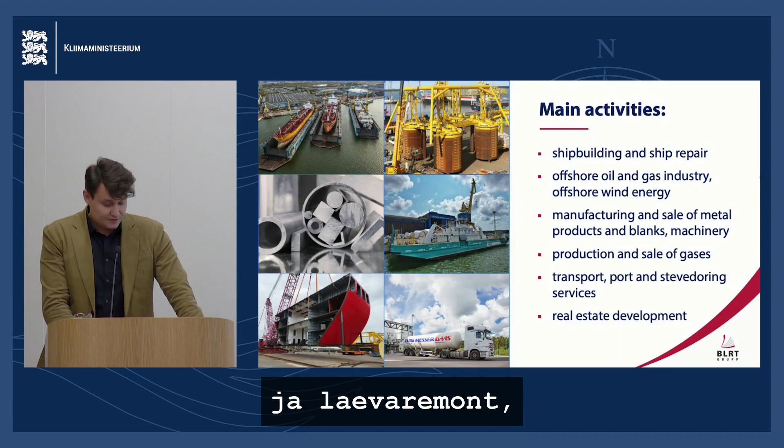Main activities: shipbuilding and ship repair, offshore and oil and gas industry, offshore wind energy, manufacturing and sale of metal products and blanks, machinery, production and sale of gases, transportation, port and stevedoring services.

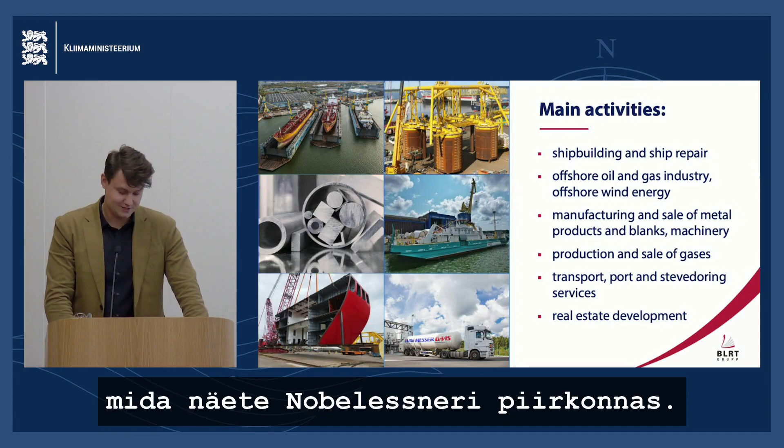Real estate development in step with the latest trends, which you can see in the Noblessner area, for example. Each subsidiary is a reliable partner in its field.

Shipbuilding is one of BLRT Grupp's historic lines of activity. Today the holding can develop a conceptual design, prepare technical documentation, and build ships on a turnkey basis.

The shipbuilding yard we have in Lithuania, named Western Baltija Shipbuilding, specializes in the construction of grand blocks for cruise ships, multifunctional supply vessels, research vessels, tugboats, and other turnkey ships up to 130 meters long.

Another shipbuilding yard we have is in Tallinn. Our shipbuilding part is mainly focused on the fish farming market and small shipbuilding, offered by the BLRT Grupp company named Marketex Marine. We offer turnkey solutions from project design and development through to finished product delivery to the customer. We have been operating in the Norwegian market since 2000 and have constructed more than 400 feed barges for our customers.

This has made a significant contribution to Norwegian aquaculture. Marketex Marine built barges with feed storage capacities ranging from 100 to 900 tons, successfully operating worldwide, from Japan to Chile and from Norway to Greece. The maximum weight of the barge is 1,000 tons.

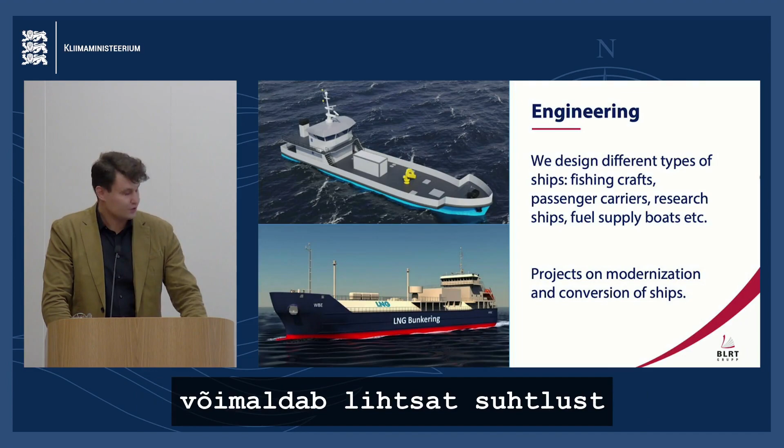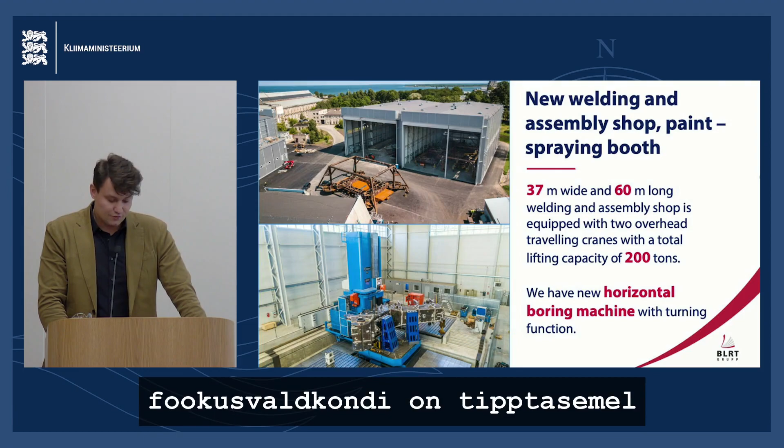One of the key focus areas of the holding is the manufacture of high-end equipment and complex structures for the oil and gas and offshore wind power industries. That's the main focus of Marketex Offshore Constructions, operating in Estonia.

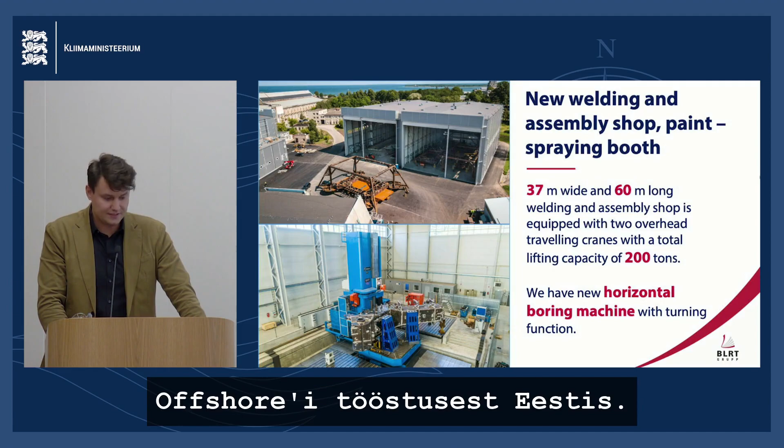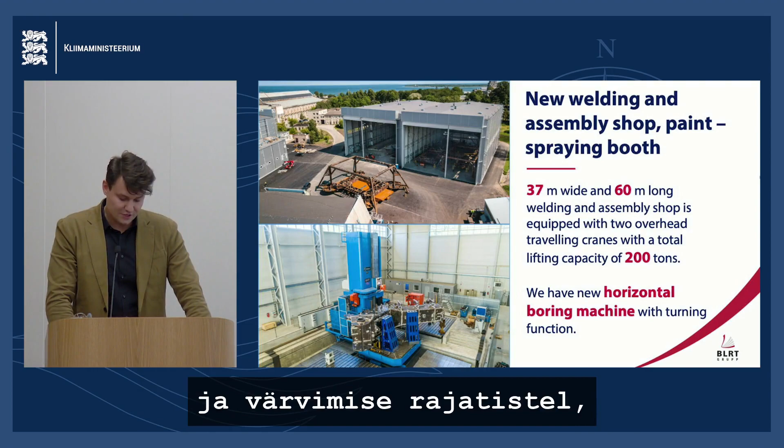In 2020, as part of our development program supported by Enterprise Estonia, we opened brand new welding, machining and painting facilities, from which we deliver large fabrication projects for the North Sea and beyond. The new fabrication facilities enable us to expand our services and meet growing customer demand.

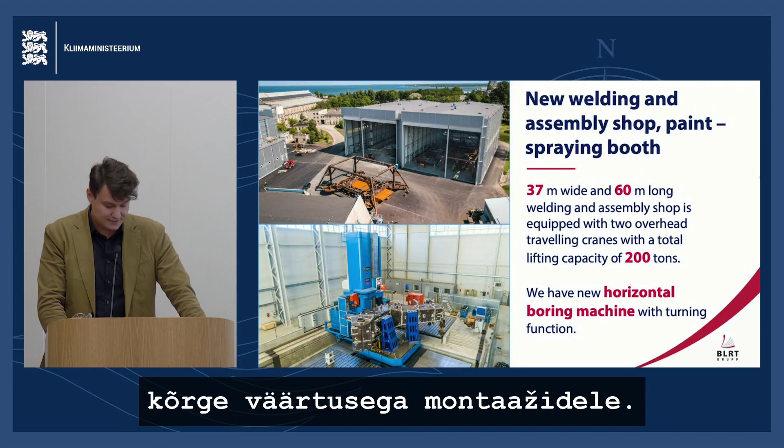We can offer an integrated supply chain solution for large and high-value assemblies. The company pays special attention to energy markets with high-quality standards and requirements, ensuring strict quality control and compliance with deadlines.

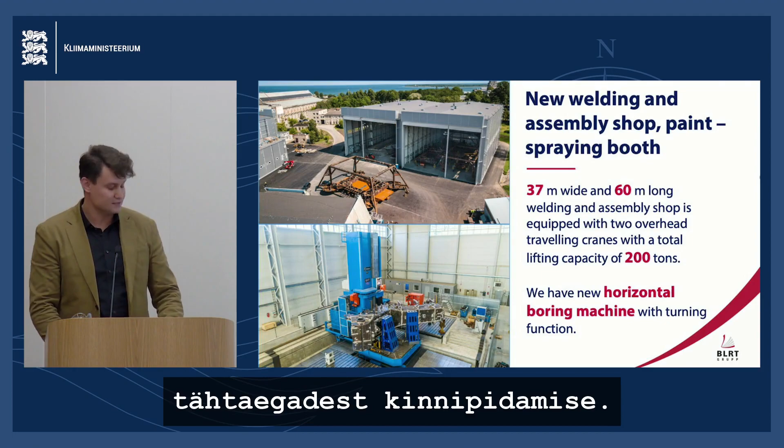Over the years, the company has implemented many challenging and unique projects. The number of implemented offshore wind power projects has been growing, validating the adopted project development and diversification strategy.

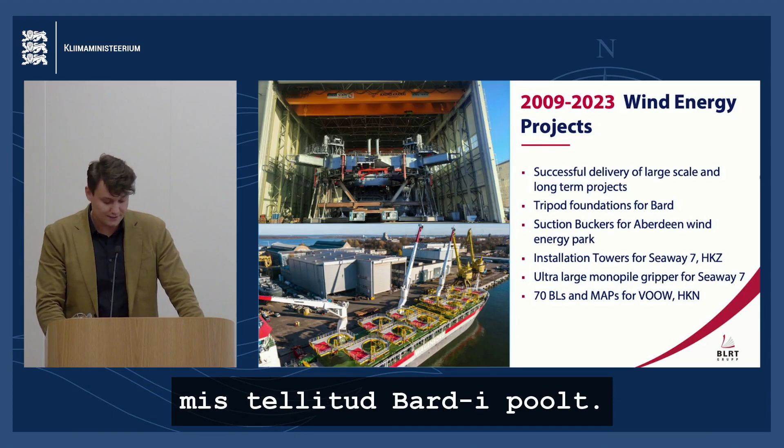For instance, the company has constructed foundations for offshore wind turbines commissioned by a German company, manufacturing and supplying 21 anchor frame structures for a 92.4 megawatt wind farm located in Aberdeen Bay in Scotland.

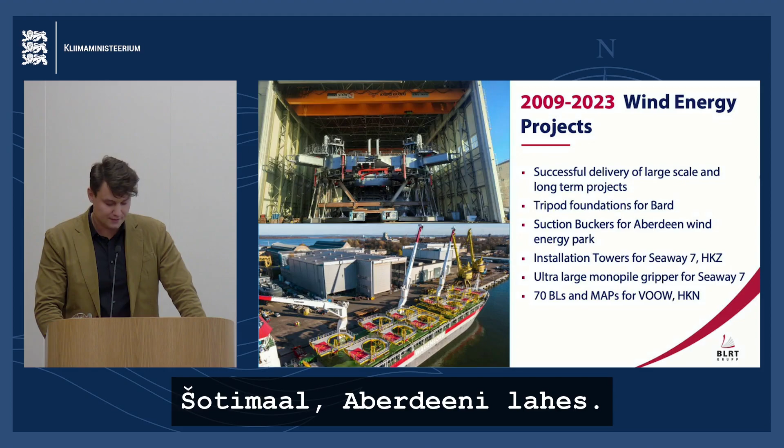Today, Marketex Offshore Constructions is the best choice for wind power projects in the Baltic Sea region. The Marketex Offshore Constructions portfolio includes some Dutch partners for which the company has manufactured various equipment.

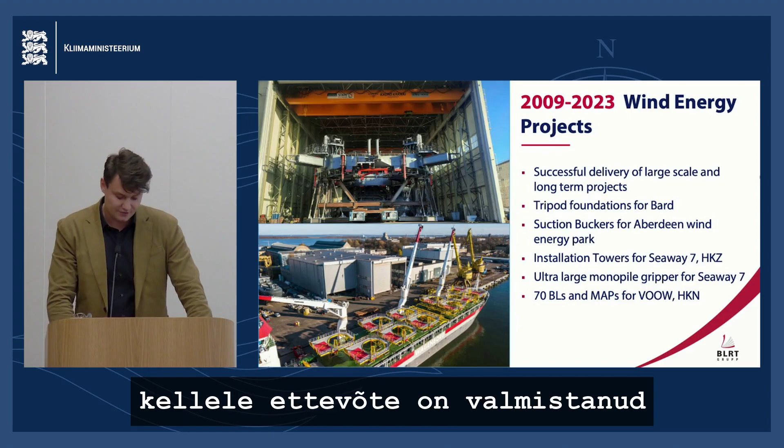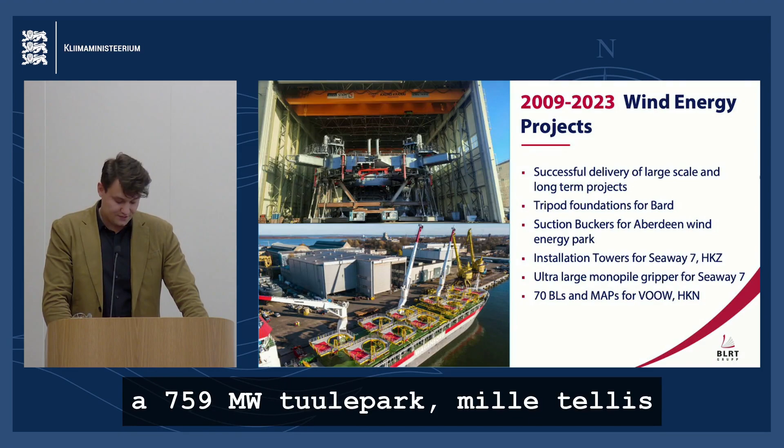One example is a unique monopile gripper for Seaway 7, for the offshore installation of monopiles up to 3,000 tons. In addition, there is another project for a Dutch customer: the fabrication of steel structures for the Hollandse Kust Noord project, a 759 megawatt wind farm commissioned by Van Oord Offshore.

And now I'm glad that we came to the shipyards part of the presentation. BLRT Group has 3 shipyards, ship repair yards: Tallinn Shipyard in Estonia, led by me, Western Shiprepair in Lithuania, not led by me, and Turku Repair Yard in Finland. Design and technical support, repair, maintenance and retrofit of different types of vessels are the yards' main activities, which we are trying to provide at the highest level.

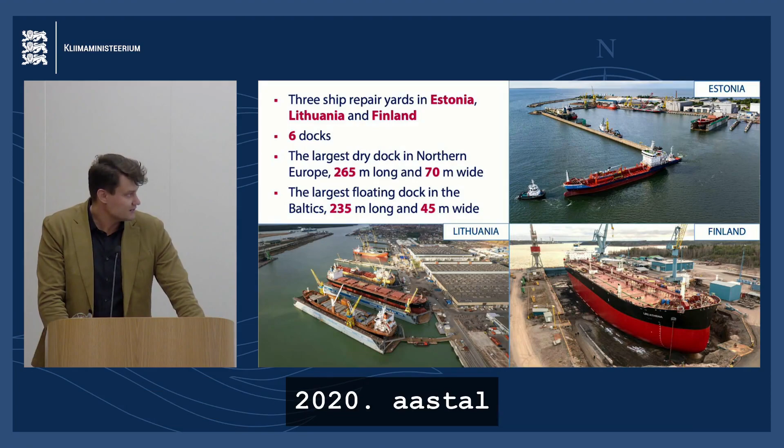In 2020, the list of docks at Western Ship Repair in Klaipėda was enlarged with 2 additional floating units. Now we have the largest floating dock in the Baltics, 235 meters long and 45 meters wide, which opens up new opportunities for customers to carry out repair and modernization projects of Aframax, Panamax and post-Panamax types of ships. We also have the largest dry dock in Northern Europe, 265 meters long and 70 meters wide, located in Turku, Finland, well known by many shipping companies in this room.

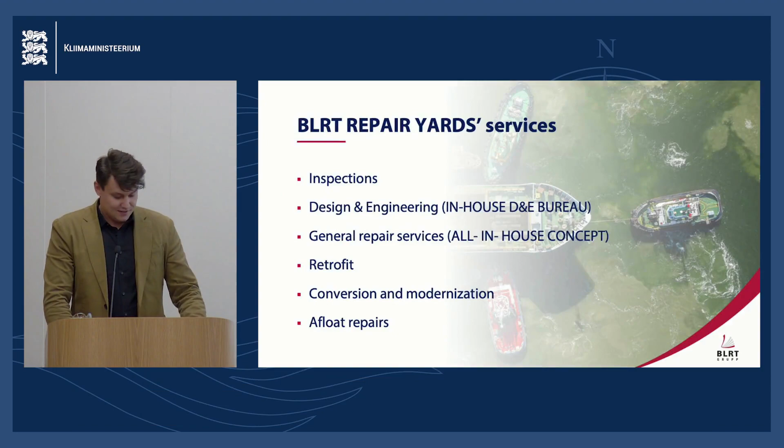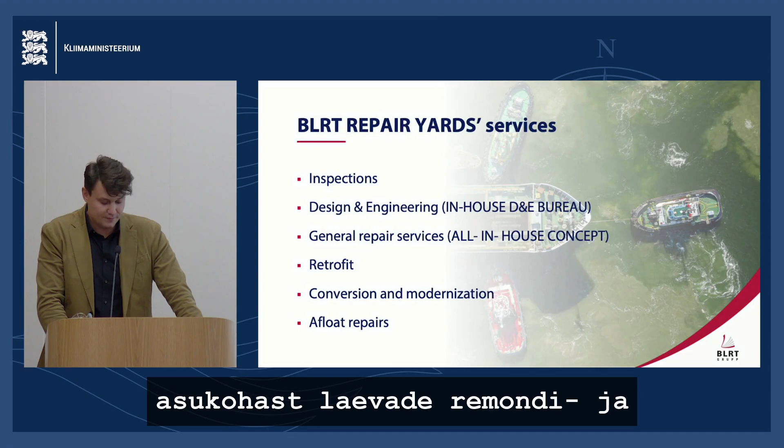In the remaining part of the presentation, I would like to concentrate your attention on the shipyards as maritime facilities, providing a wide range of technical solutions for ships in operation. Situated on the shores of the Baltic Sea, our shipyards benefit from their strategic location for ship repair and maintenance services, as well as implementation of major conversions in the maritime sector.

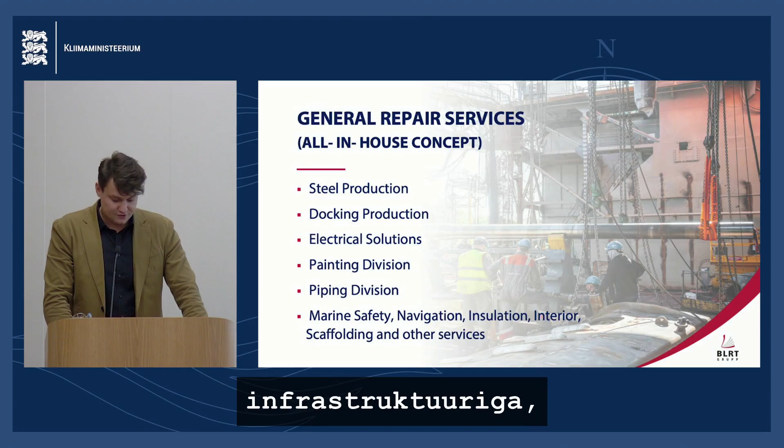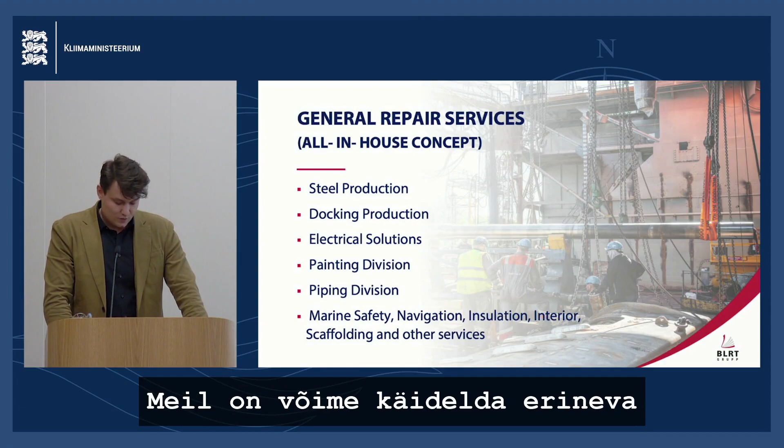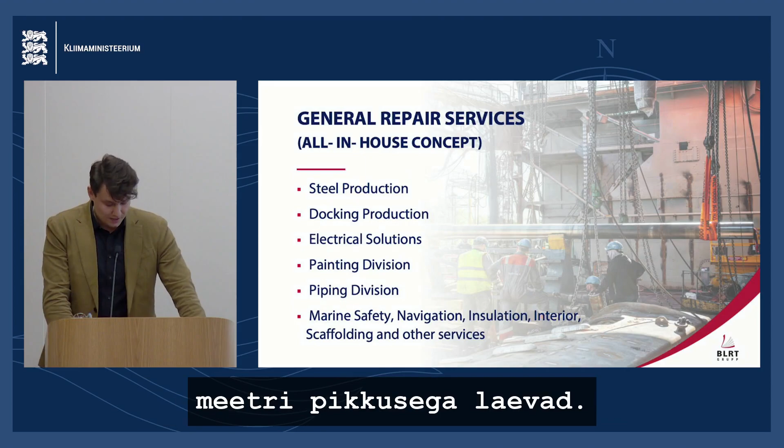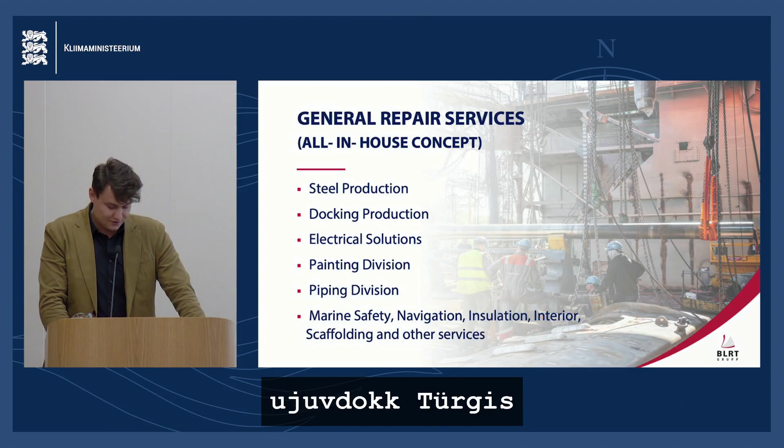Last year we decided to update the biggest floating dock, and now a new 10,000 ton floating dock is under construction in Turkey. But I will touch on this topic a little bit later.

Due to that, the clients of a shipyard widely depend on the shipyard's size and location, so our 3 shipyards are also divided into segments, both by commercial shipping companies and by ship sizes. We are maintaining and repairing around 290 ships within one year. Our main clients are from the Baltic Sea region, like Netherlands, Belgium, Germany, Norway, Sweden, Finland, and the Baltic states. However, we are not only limited to this region. For example, we have clients from Greece, Italy, Spain, and actually from China and Malaysia also.

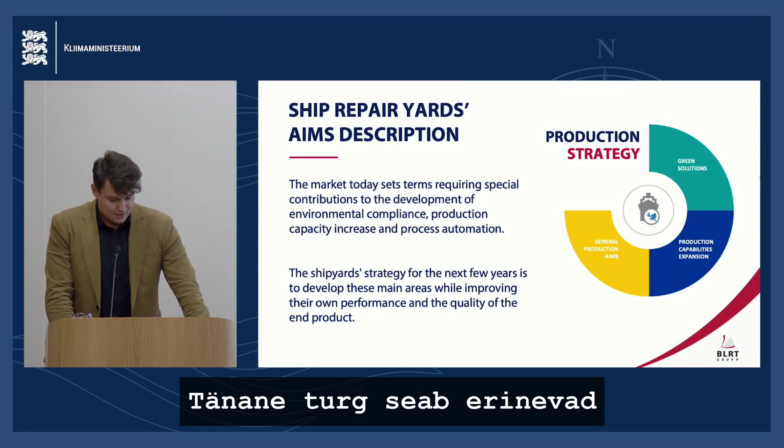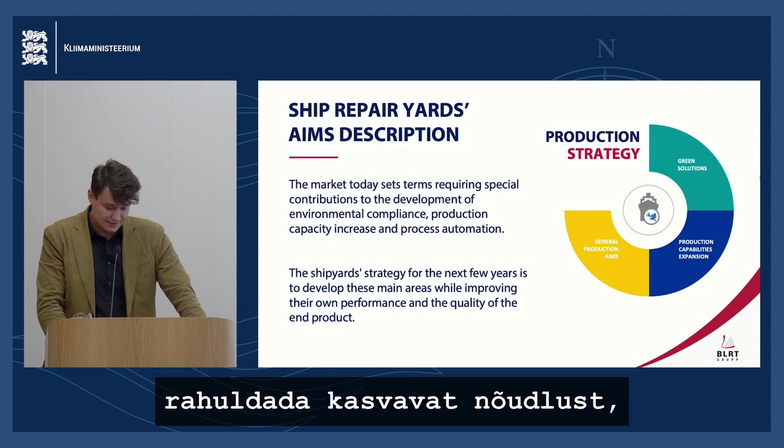Today's market sets different terms and strategic movements for our ship repair business, aiming to increase output, meet growing demand, enhance efficiency, so in general to expand and automate our production capabilities, of course taking into account the environmental impact and constantly lowering it.

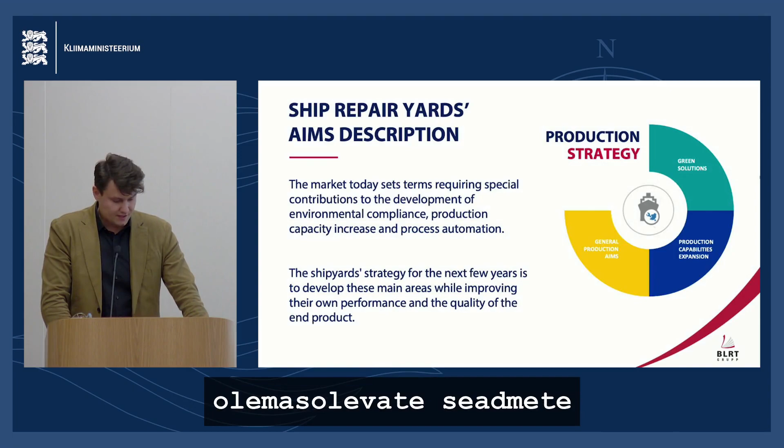We are investing in the necessary technologies and equipment, purchasing new machinery, upgrading existing equipment and productional areas, implementing automation and digital solutions to enhance efficiency.

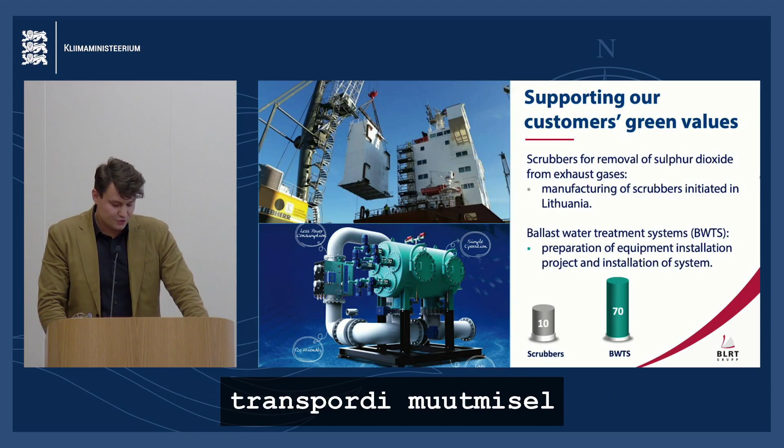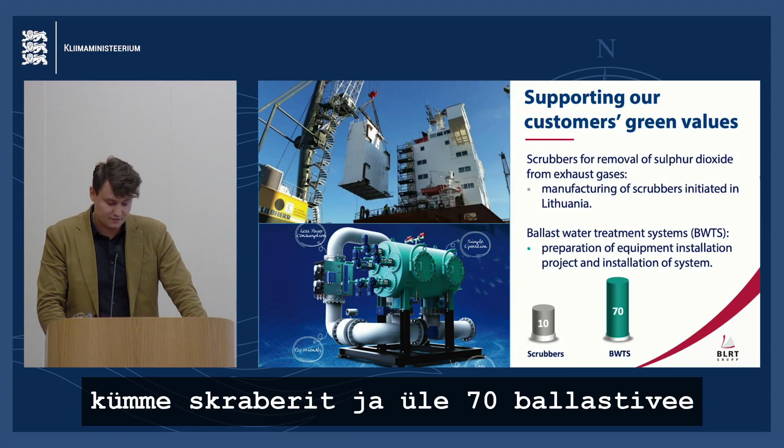During the last years, we were actively helping to make maritime transportation more environmentally friendly and compliant with compulsory international regulations. So, for example, we were installing around 10 scrubbers and over 70 ballast water treatment systems annually.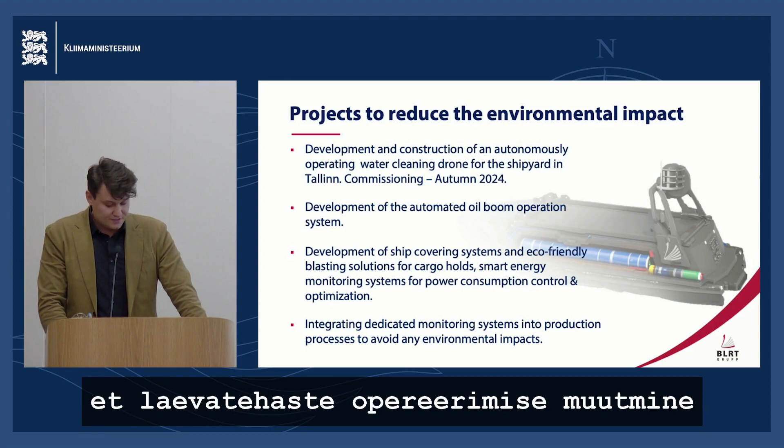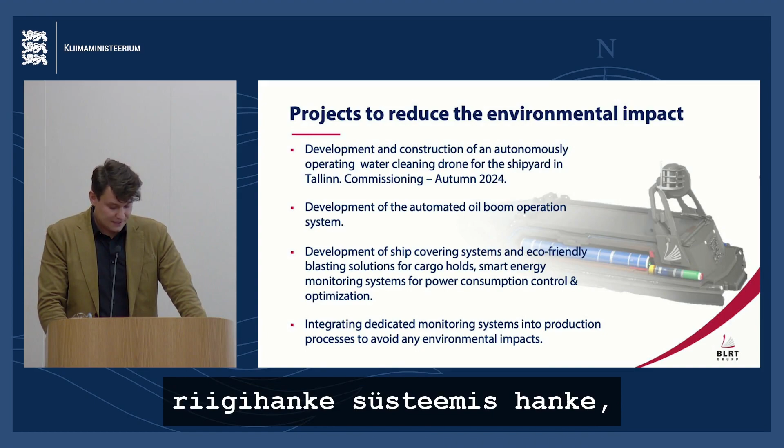We believe that making shipyard operations more environmentally friendly is important, as is reducing the environmental impact of shipping. So this year we opened a tender in the Riigihanke system for development and construction of an autonomous water cleaning drone for Tallinn Shipyard. This is an innovative and technology-driven solution designed to clean the water surface around our floating docks and berthed ships. The drone has to be equipped with various sensors, cameras, and cleaning skimmers to autonomously navigate through the water.

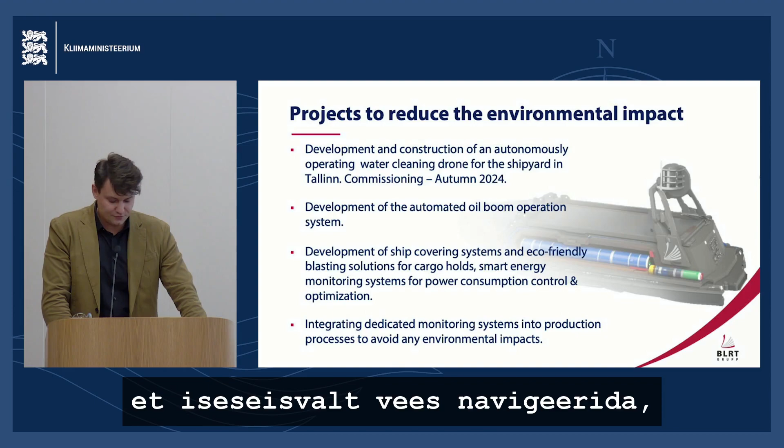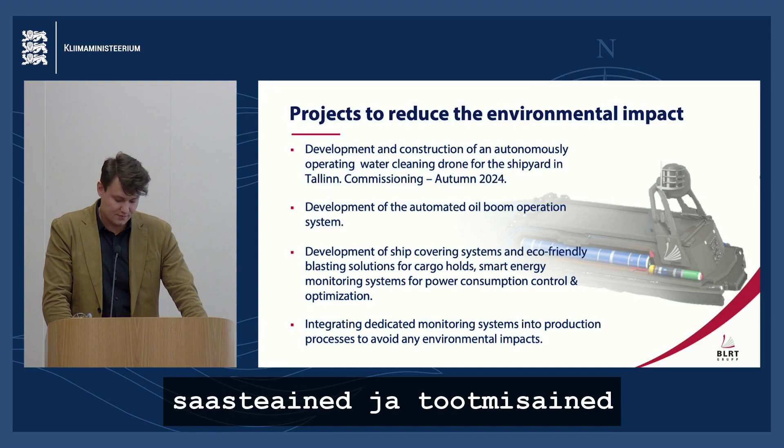For monitoring the situation, and in case of necessity, to perform tasks aimed at removing pollutants and productional substances. Next year you will be able to see this in operation, so you are welcome at our yard.

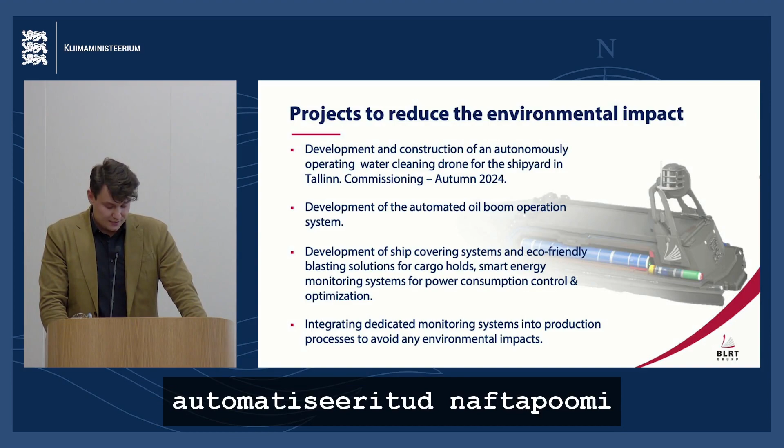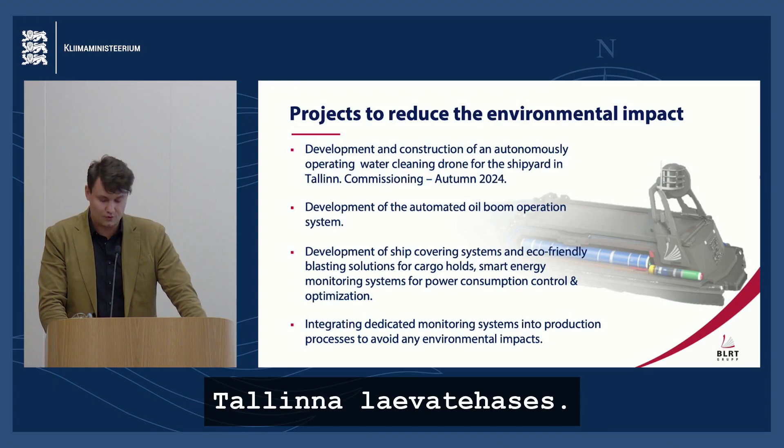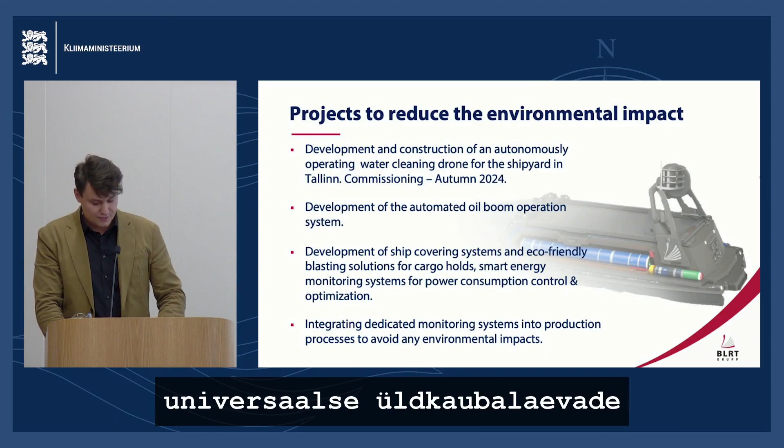We are developing an automated oil boom operating system, a technological solution designed to deploy and control oil booms used in spill response and containment efforts in Tallinn Shipyard's port water area. In addition to the purchased blast trucks and Hammelmann systems, which I will also mention on the next slide, we are working on universal general cargo ship hull covering solutions to be able to sandblast dedicated zones in green mode.

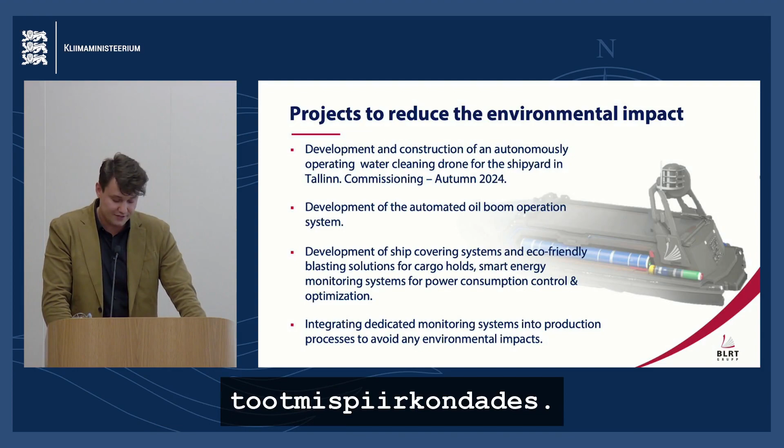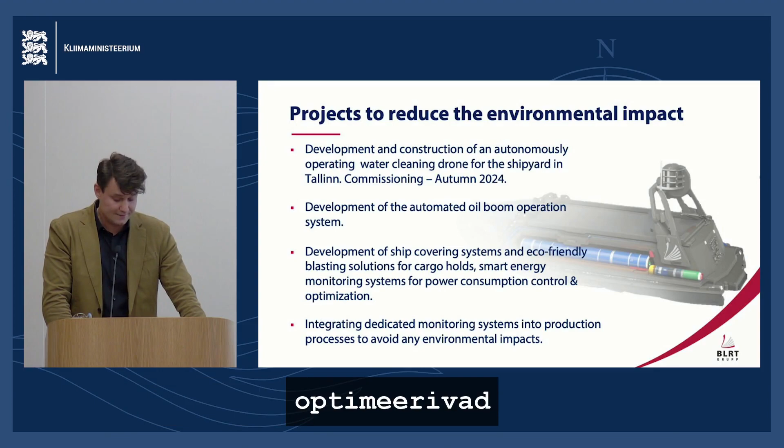In addition to some of the solutions mentioned above, we are also developing advanced technologies designed to monitor, manage, and optimize energy consumption in shipyard productional areas. And worth noting, each floating dock will have more than 100 implemented sensors for real-time monitoring and optimizing of energy distribution during the next few years.

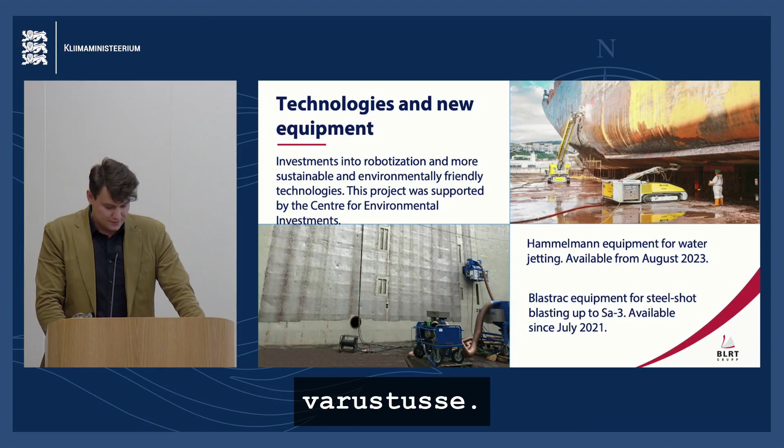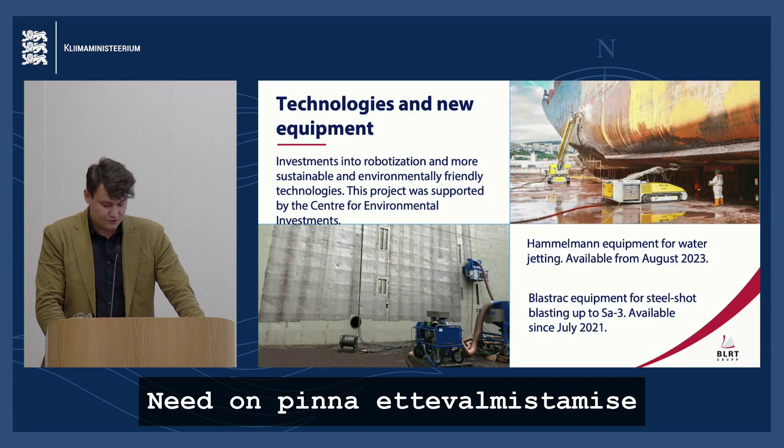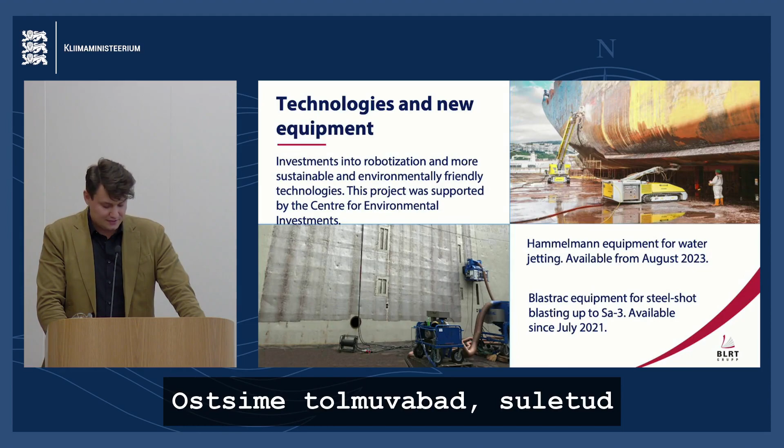As I mentioned before, we are always trying to use and invest in up-to-date equipment. On this page you can see the dust-free blasting solutions, also known as dustless blasting or wet blasting. These are methods of surface preparation and cleaning that significantly reduce or eliminate the production of airborne dust and debris. The purchased dustless closed-cycle blasting machines, named Blastrac, are working quite well during the last 2 years at our shipyard in Tallinn.

Hammelmann high-pressure blasting system we just put into operation, but already a few ships were cleaned using that, so it looks quite well.

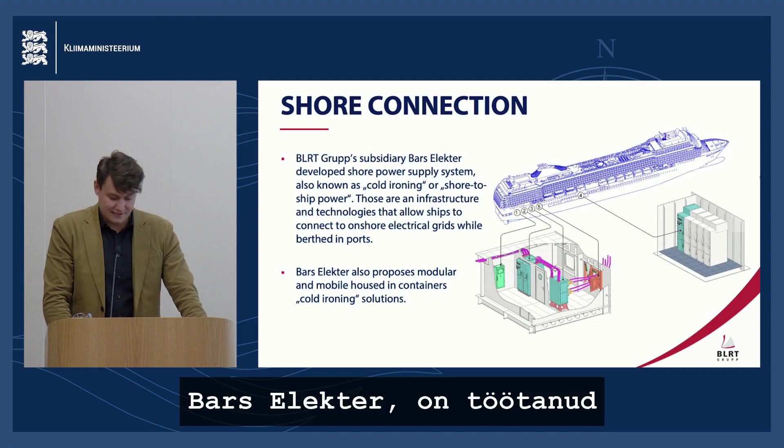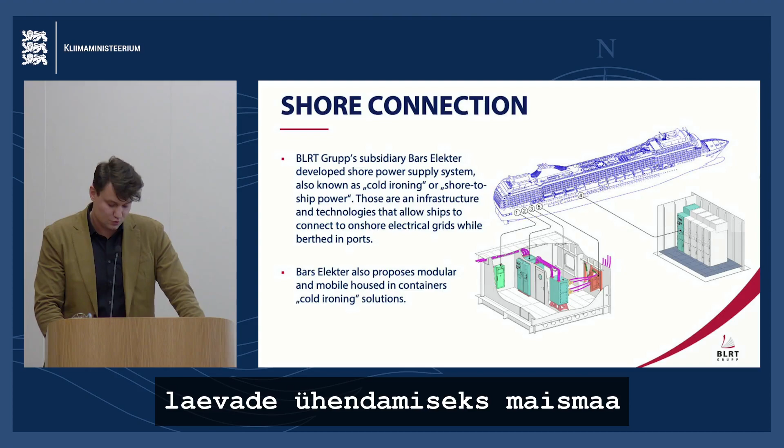Shore connection. BLRT Grupp's subsidiary company Bars Elekter has been working on green ICT projects. The innovative project centers on developing a system allowing moored vessels to connect to an onshore power supply and turn off their diesel generators. The system is modular and compact, therefore it can be installed in any suitable place on board an already built ship.

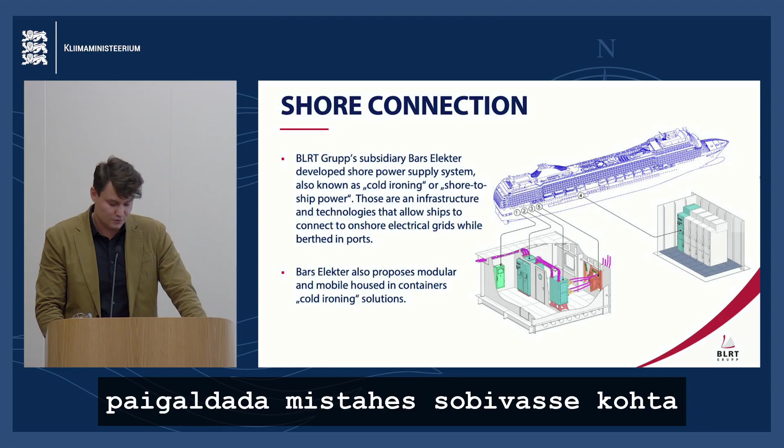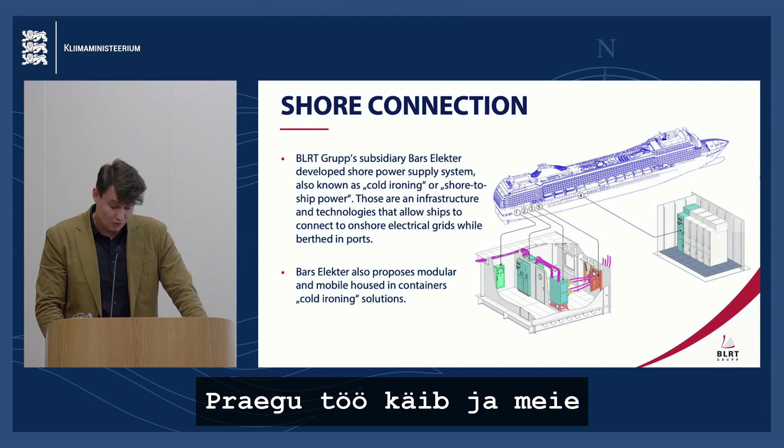We have signed a contract to install our system on board the Isabel vessel. Work is currently underway, and all our findings and innovations will come into use there, meaning that we will not only produce a viable solution, it's a turnkey project including the installation and related works.

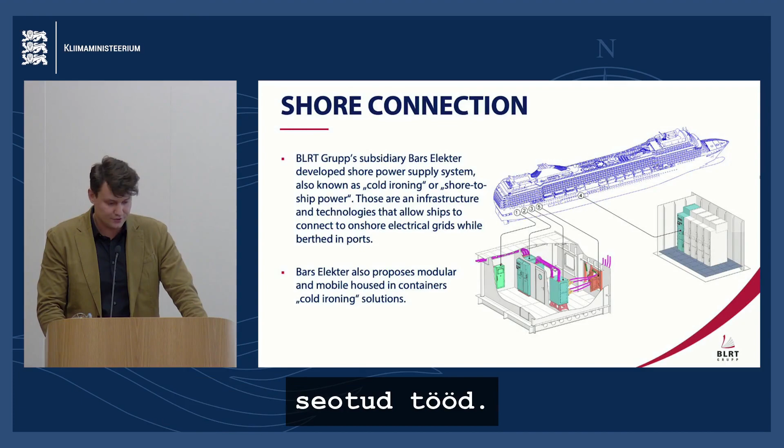Bars Elekter also proposes an innovative approach wherein a vessel would have two containers, one containing onboard elements and another containing onshore elements. The systems are modular, mobile, and housed in the containers, which means that they can be utilized both on board and onshore.

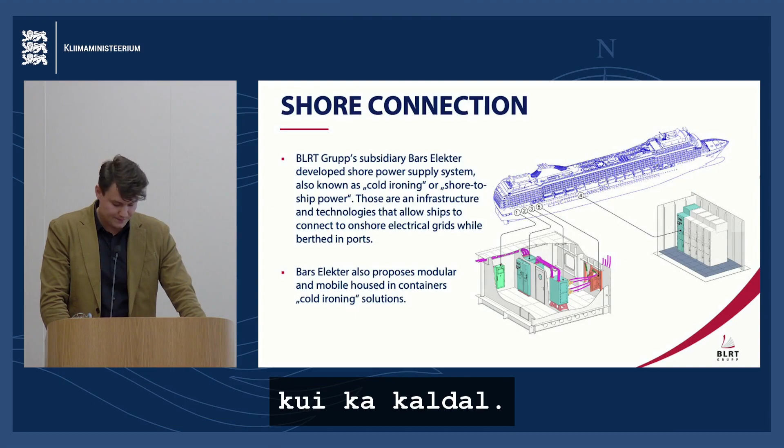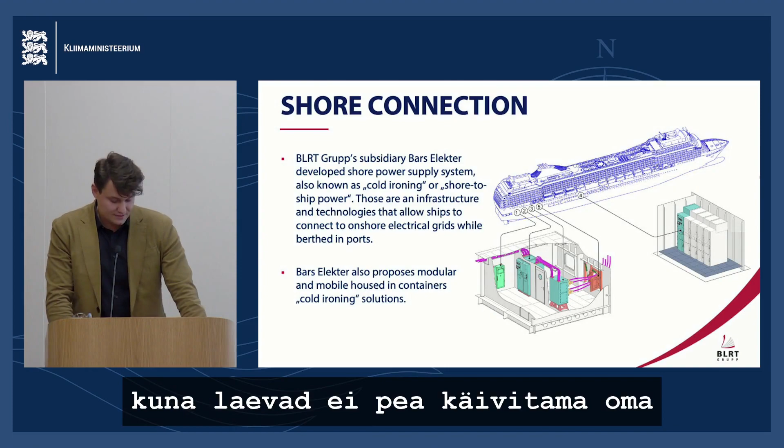The green ICT projects of Bars Elekter take the company one step closer to reducing CO2 emissions and decreasing harmful environmental impact, since the ships will not need to start their auxiliary engines and generators in ports.

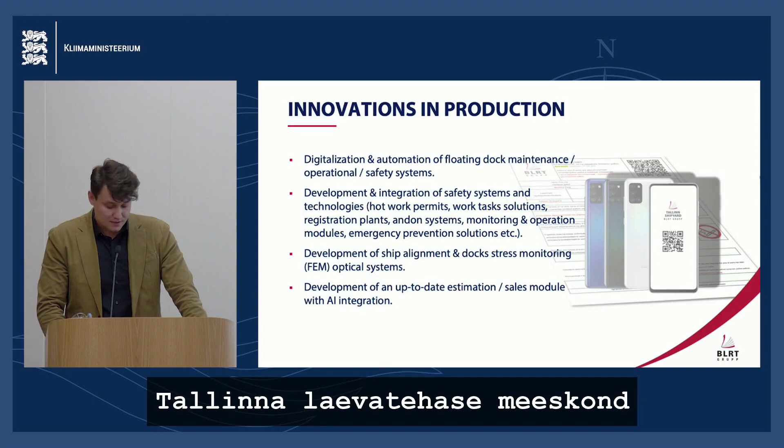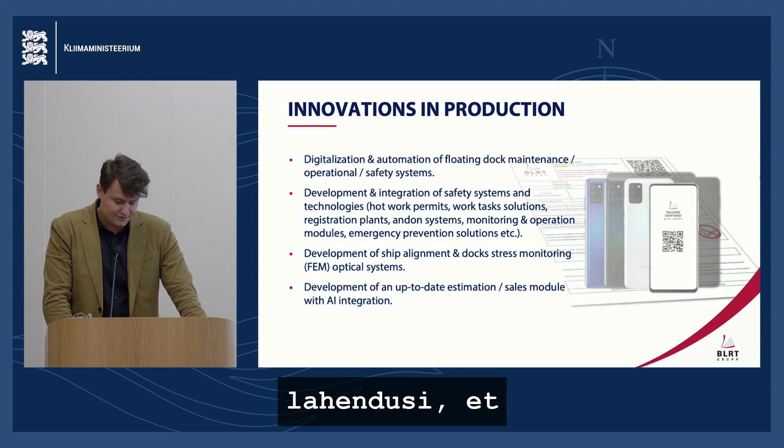Each and every day, Tallinn Shipyard's crew makes efforts to enhance efficiency, reduce downtime, improve safety, and ensure compliance with industry and marine standards. Over the past few years, we implemented the integration of advanced digital technologies and data-driven solutions to streamline and optimize the various aspects of ship repair and production platform maintenance.

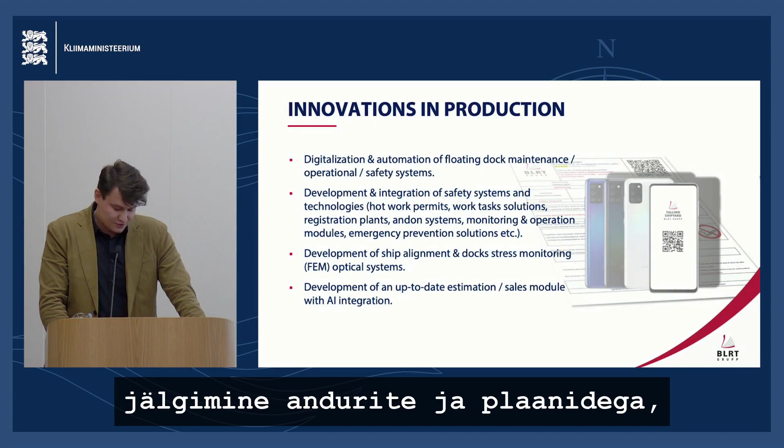Our development policy is based on Internet of Things technologies, which plays a crucial role in ship repair digitalization. Condition-based monitoring of ship repair processes with sensors and plans helps to control fire safety, work tasks for each person, performance of dedicated productions, environmental conditions, prevent emergency situations, and many other things.

We are working on unique solutions which should improve the quality and safety of dedicated operations, such as docking and alignment of ships. We will be able to remotely monitor the condition of separate dock structural elements from the ship's weight distribution using real-time sensor readings.

This will also give us an inside view that helps to increase the reliability and durability of our main marine ship lift systems.

Despite integration of digital solutions to the productional part of ship repair, we do not forget about the fundamental aspects of our activities. I am speaking about sales and estimation, because ship repair begins with the sales.

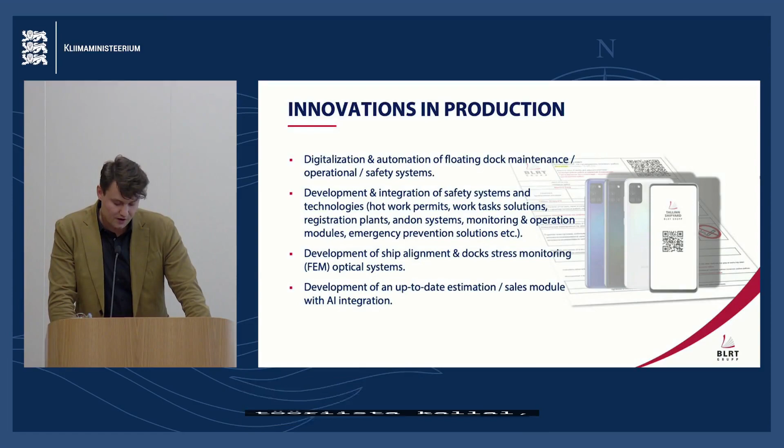At this moment we have an ongoing project where we are working on a powerful tool that can significantly enhance the sales processes, improve customer interactions, and boost sales effectiveness. A sales module software with artificial intelligence add-ons could be a successful strategy breakout.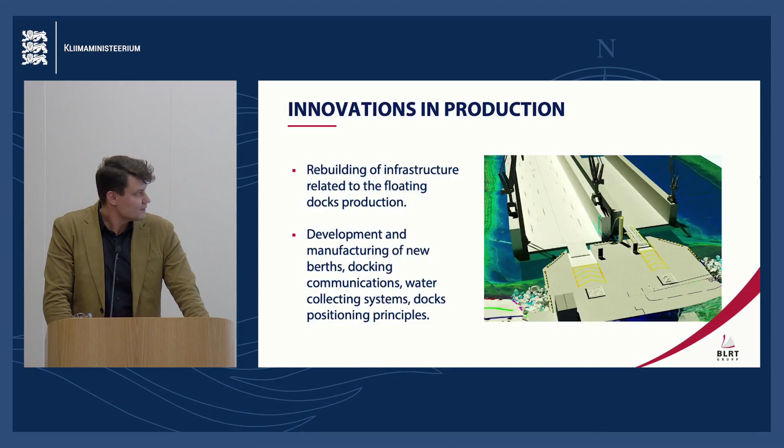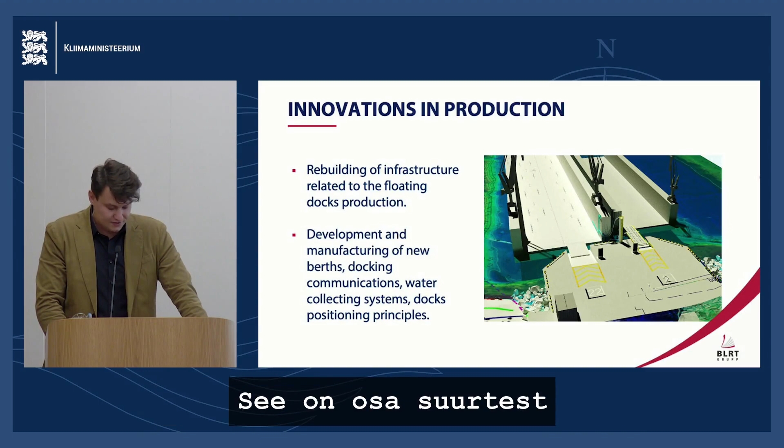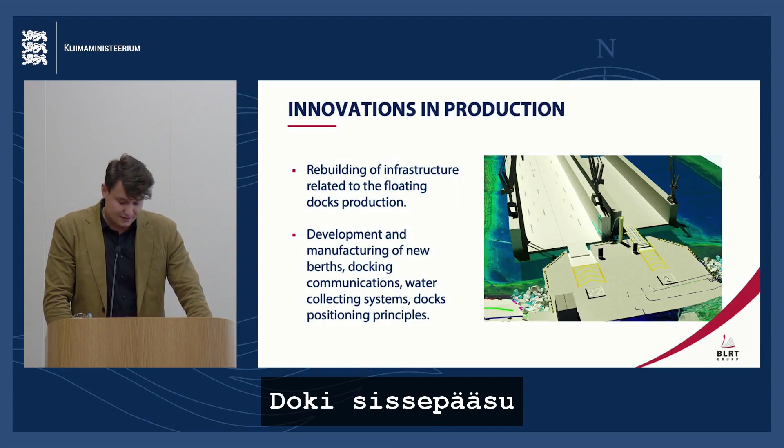Also, this year we opened an investment project to rebuild the infrastructure in the area which provides access and communication for the docks. This is part of the big investments into the new building of a 10,000-ton dock and major conversion of the smallest floating dock number 2. The design and functionality of dock entrance infrastructure are crucial for efficient and safe ship repair operations.

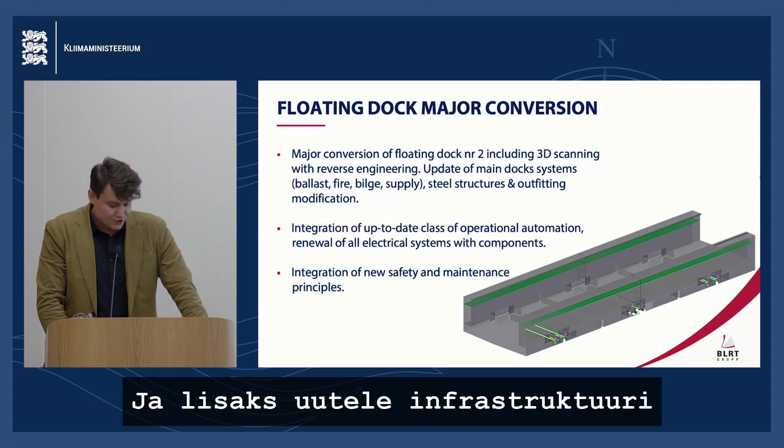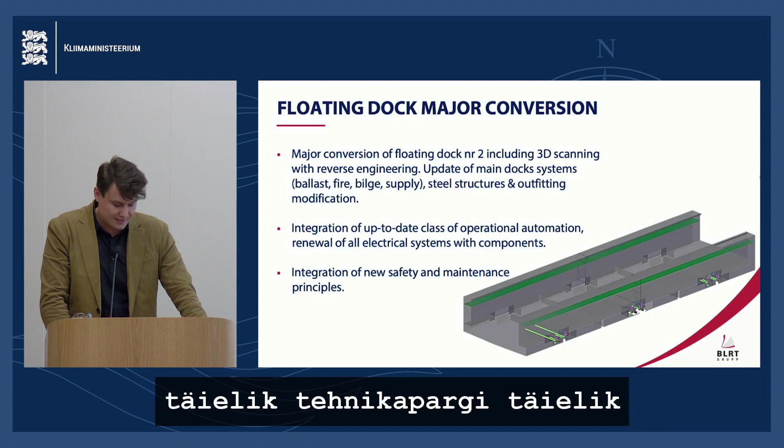In addition to the opened infrastructural and dock new building investments, we decided to keep and not change the smallest Tallinn Shipyard's floating dock number 2, but also carry out major dock conversion, which is a complex and significant undertaking that involves transforming its existing structures, including strengthening of load bearing capacity, full renewal of the machinery part, electrical part.

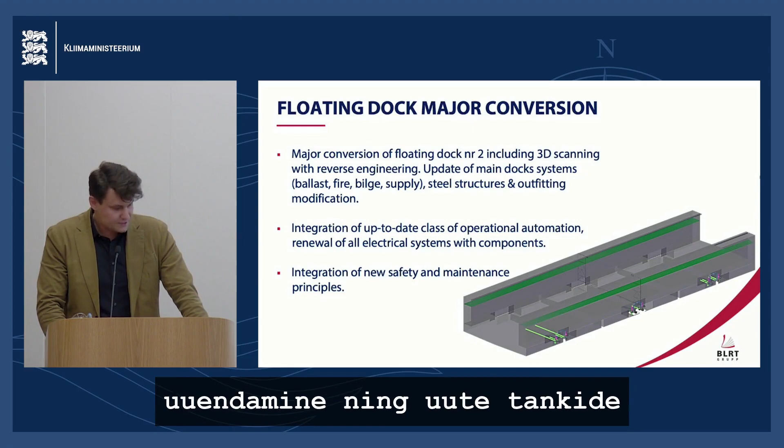Total renewal of the pumps and sensors and new tank leveling systems and other things. So the dock will have our latest digital production implementations and automation class.

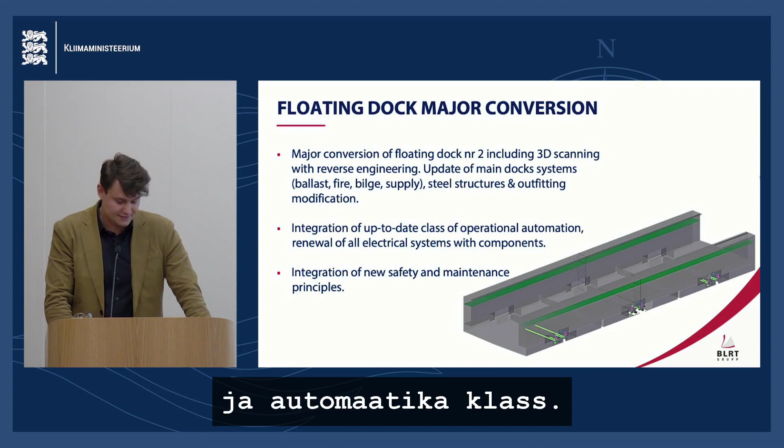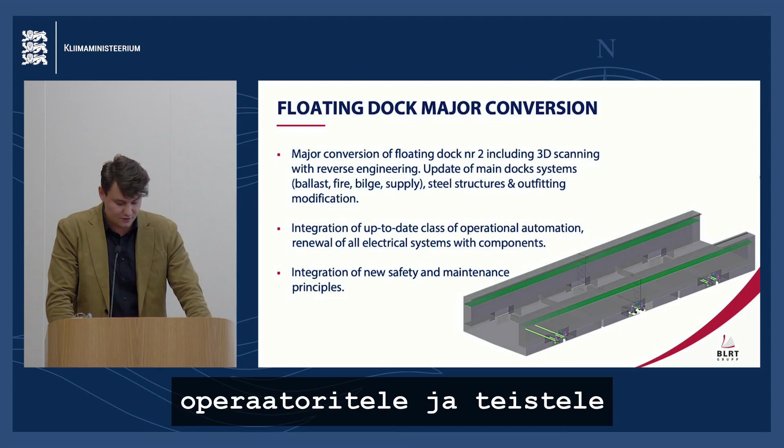By making this kind of investment, we would like to ensure a positive and successful experience for ship owners, operators, and other clients seeking repair and maintenance services for their vessels.

Now I would like to share my joy with you, since I was the direct initiator, if I can say so, of the purchase of the new floating dock and replacement of the old one.

The new dock construction is yet another step of the investment program for the ship repair segment of the industrial holding, aimed at the significant expansion of facilities and resources made available to ship owners at our shipyard. Over the last 5 years, we invested more than 75 million euros into that segment, and we have every intention to proceed with the investments in the future.

This is a short video. We'll show you what we're doing and who we are in a short video. Sorry, how do I put this into play? Maybe somebody can help... one more click, okay. Oh, thanks.